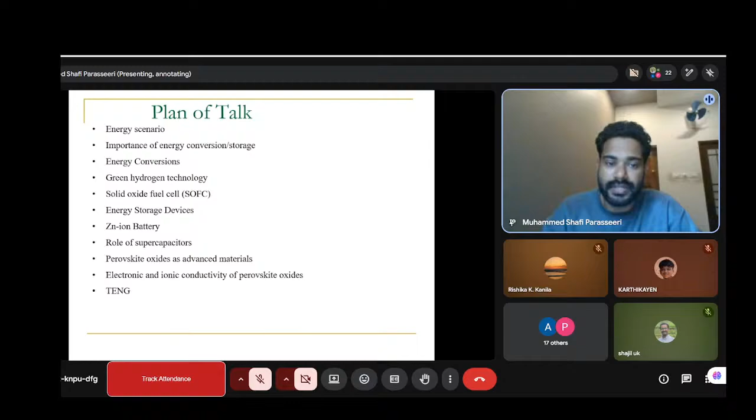I will cover the energy scenario, importance of energy conversion and storage, green hydrogen technology, solid oxide fuel cells, energy storage devices like supercapacitors, batteries, and zinc ion batteries, and triboelectric nanogenerators.

Before going to my topic, I will introduce my career path. I started my schooling from my native place. I belong to Malappuram district, a place called Kisheri, near Kondoti, near the airport.

My UG is from Mambad MES College, affiliated to Calicut University. Then I moved to Aligarh Muslim University for my master's.

Aligarh Muslim University's library is very famous. It is the second largest library in Asia, with many ancient books and a large collection. At a time, 5,000 students can sit and work. There are 7 floors and maybe 7,000 seats. So there is great importance to that library.

Many students join some course in an art subject or something but do not attend the class. Instead, they use the library to prepare for civil service and other competitive examinations, and there are many successful examples.

Then I moved to National Institute of Technology, Tiruchirappalli for my PhD program. NIT Trichy is the number one NIT among all other NITs in India.

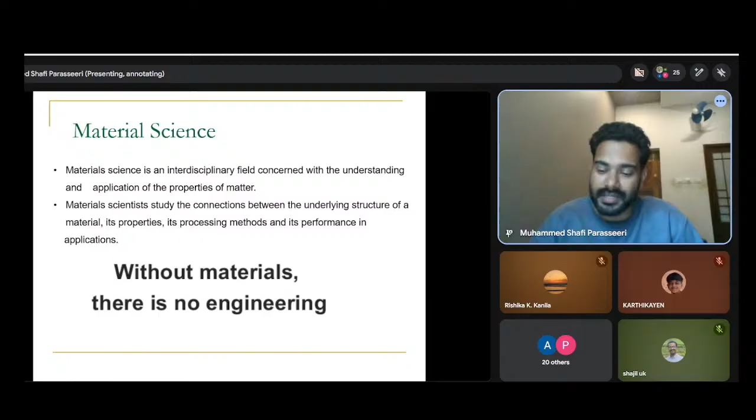This is how, depending upon the property of the materials, we classify the physics, or the material science, into different categories.

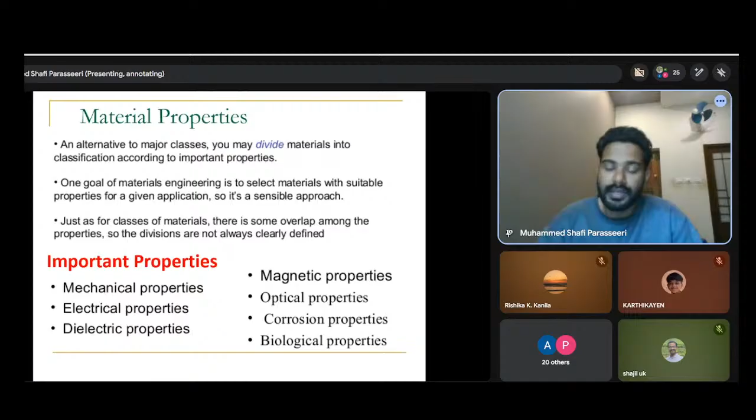So I work on energy material. Why energy? We know that the ultimate factor which controls the world's movement and everything depends on energy. Without energy, we cannot stay, right?

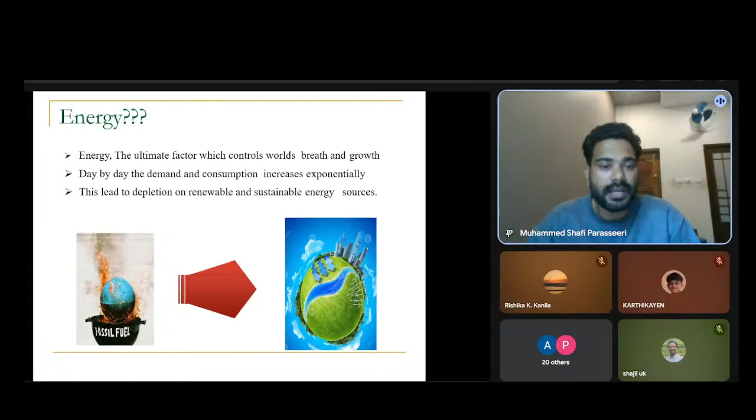Day by day, the consumption and demand is increasing exponentially. And as Shajil sir mentioned in the introduction, because of the war also, now people are facing this issue, we have a shortage of commercial gases, and petroleum product prices are getting high. So this is all because energy is an inevitable component in our life.

And also we know now we are getting the energy from the non-renewable sources, especially from the fossil fuels. So we know the drawbacks of fossil fuels. So the first one is its availability. We have only limited sources. Maybe we can move using the fossil fuels another 80 or maximum 100 years. We do not have much more sources to run our world.

So now people have started thinking about alternate energy. That means what we can do, what alternate source we can find instead of these fossil fuels. And also, other than these limitations and availability, we have some other problems, the environmental issues like global warming and all. Because the fossil fuels, we know, are all non-renewable energy sources. At the same time, they emit gases, pollution.

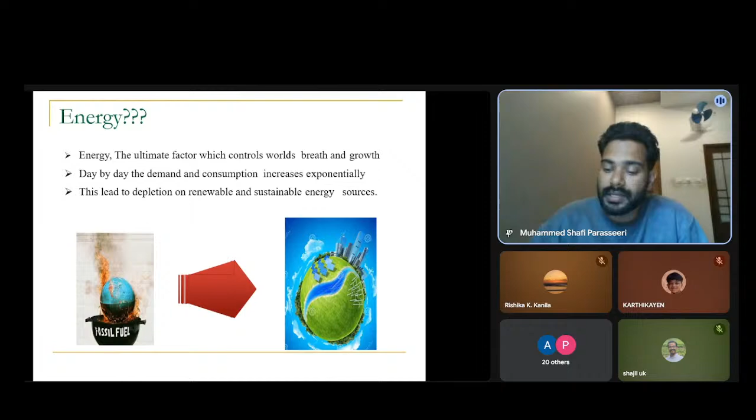They create pollution. The vehicles we are using, the majority of vehicles run on petroleum fuels, right? So we have the emission issue, we have the pollution issue. In the winter season in Delhi, they suffer like anything, right? So we know all these issues. That's why people started thinking about alternative energy and a green environment.

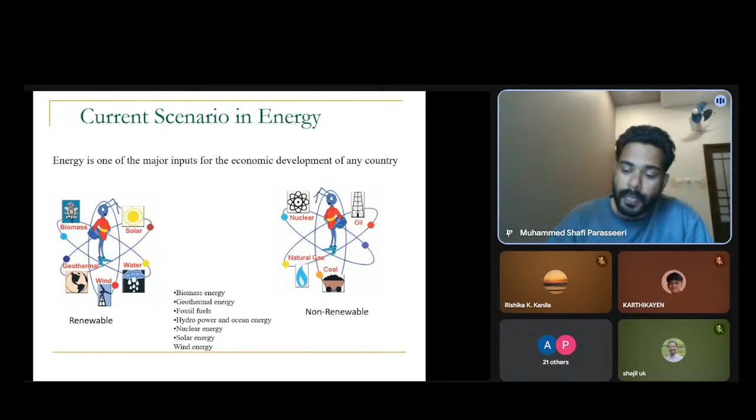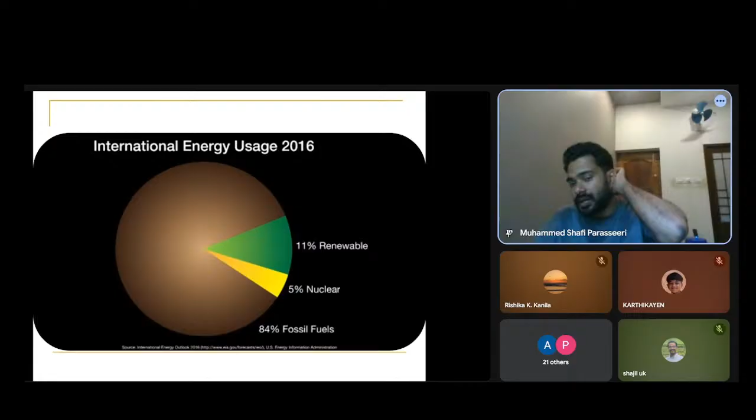So instead of using coal, we have to switch to renewable energy sources. We should move with biomass energy, solar energy, geothermal energy, wind energy and hydropower. Now in 2016, the statistics say that the world depended 84% on non-renewable energy sources, and only 11% came from renewable energy sources. That means the majority, approximately 90%, comes from non-renewable energy sources. So that creates a lot of issues.

So this is the current scenario: the increased demand for energy and shortage of fossil fuels, and at the same time the environmental and pollution issues from using these fossil fuels, global warming, greenhouse effect, all these. According to the World Energy Council in 2017, the growth in energy consumption has been higher than anticipated in the high growth scenario. So to enable the development of a sustainable economy and society, we should move to clean and renewable energy sources that can substitute for fossil fuels. This is the only way we have to overcome these challenges.

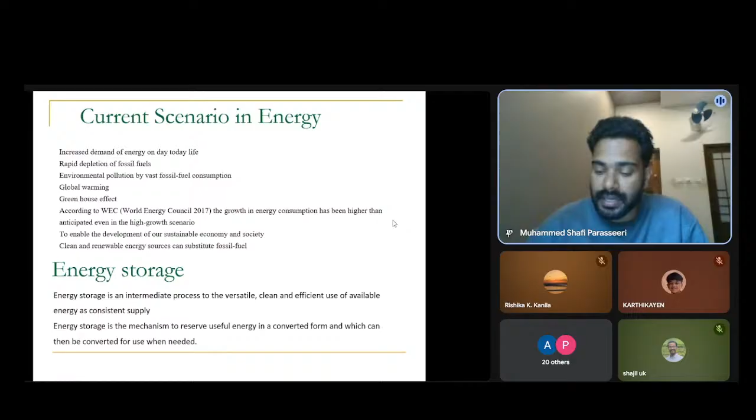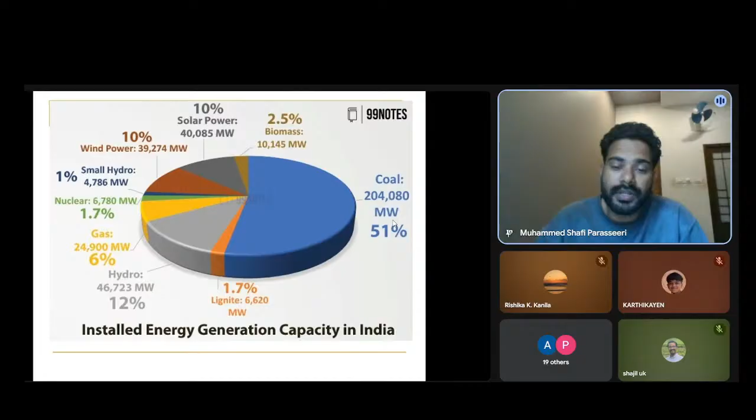India ranked third in renewable energy installation in 2021 as per the Renewables 2022 Global Status Report published by REN21, the Renewable Energy Policy Network for the 21st century. About 42% of India's total installed power capacity comes from renewable energy sources. That doesn't mean we are using 42% renewable energy; it means that of the power plants installed, 42% are renewable. And India ranked fourth in total installed solar power, almost 60 gigawatts for 2021, overtaking Germany.

In December 2022, India had 41.8 gigawatts of wind energy and 61.9 gigawatts of solar energy in place, according to the Ministry of New and Renewable Energy. And projects worth $200 billion are underway in India for the renewable energy sector, as per International Energy Agency reports. That's why people like me are getting funding from the country to develop this kind of technology.

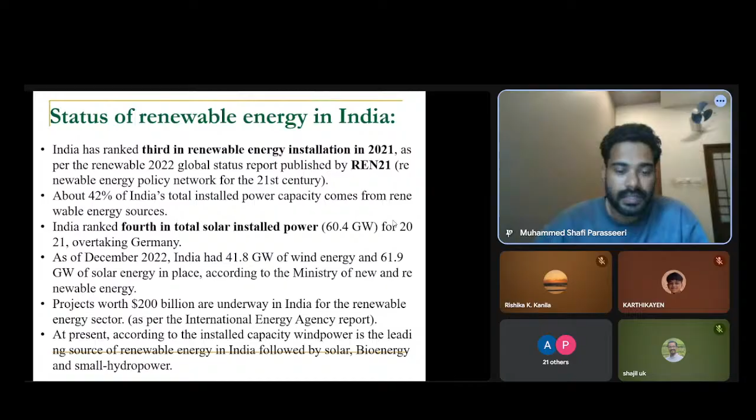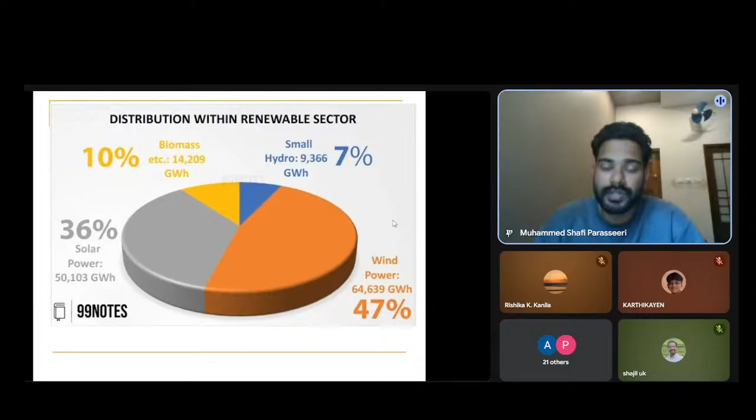So now coming to the distribution of this renewable sector, there are different types of renewable energies in India. This information I also got from 99notes. So you can see 10% comes from biomass, small hydro is 7%, the majority, 47%, is from wind power, and the remaining 36% is from solar power. So this is the statistics of the distribution of the renewable energy sector in India.

Now coming to solar energy, we know there are two types of solar energy. One is using photovoltaics: it can absorb the light energy and convert it to electricity. And another one is the thermal energy from the radiation of the sun that we are using and putting into some channels, and we are using that for electricity generation and other kinds of activities. So these two types are from solar energy.

And coming to the solar energy parks in India, there is Bhadla in Rajasthan, more than 2,000 megawatts, and Rewa, 750 megawatts, and Shakti Sthala around 2,000, and Kurnool, Andhra Pradesh, that is 750 megawatts. So this is the distribution of the solar energy parks in India. And you know the Cochin Airport is completely run by solar power. So you can see there are many large areas of solar plants and solar panels.

Now coming to wind energy, this is just the conversion of wind to mechanical energy and then to electricity, right? So the turbine rotates using this wind, and the issue is we need a lot of investment for that. But it is a long-term investment, so that's why we can get back whatever we invested. But there are many issues for wind generation.

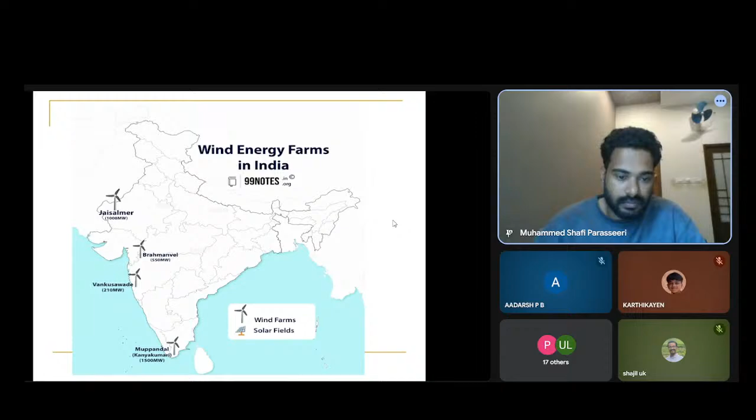Like environmental issues are there: birds, while flying, get killed by the turbine blades. And it is very difficult to put it in a residential area because it makes noise. These issues are there, but still in India we have many wind energy farms. You can see the distributions in the figure, like Jaisalmer and Brahmanvel, and many places are there. You can see here.

And coming to hydrogen, it's another type of energy. It comes from water. So this is a new technology where we are splitting the water, right? We know the constituents of water are 2 hydrogen and 1 oxygen. So if we are able to successfully split this water into hydrogen and oxygen, we can use oxygen for different purposes, like for respiratory issues. The oxygen mask is very important in the hospital, right? So there is nothing to waste. Whatever you get from the water, hydrogen and oxygen, both are important and very useful.

And hydrogen is used as fuel. You can see it in most fuel cells, and nowadays there are hydrogen vehicles also. You know Nitin Gadkari, our transportation minister, has one vehicle that is powered by hydrogen fuel. So what I mean to say is this technology is not far. It is still in a growing stage, but people are using it. This comes from water, which means it's a renewable kind of thing.

So coming to hydrogen, we need 3 steps. The first step is hydrogen generation: we have to generate hydrogen from water, meaning we should successfully split hydrogen and oxygen from water. Another important task is storage. Hydrogen is a light gas, right? So we need a big container, big space to store it, so it is not practical to store it as gas. What we have to do is compress it, or liquefy it by compressing. And hydrogen is very explosive, and it's not feasible to use in normal atmosphere.

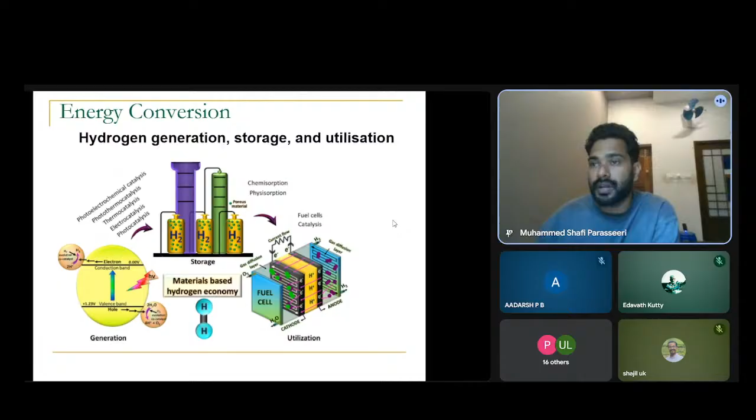Coming to its existence in nature as a gas, we do not have hydrogen. We cannot use natural hydrogen because natural hydrogen is very scarce. It's less than 0.00005%. The majority is nitrogen, then oxygen and argon, these kinds of things, right? So we do not have hydrogen as a free gas in our atmosphere. So what we have to do is get it from water.

That's why catalysis becomes important, because the thermodynamic potential for water splitting is around 1.23 volts. So we have to give this voltage to separate hydrogen and oxygen. That means it is a kind of... instead of making a glass of tea, you are spending a bucket of tea. You are using a lot of fuel and you are getting a small amount. That is the issue with using the conventional method.

That is why people try to reduce this overpotential of 1.23 volts to below 1 volt. Only then is it economic. You have to give a small potential to split the water; only then is it useful. If you are giving a lot of energy to split it, that means it is not convenient, right? So this is why people are working on the catalysis part. Many materials are very good catalysts. They can reduce this potential and enhance the production. So this is for the catalyst.

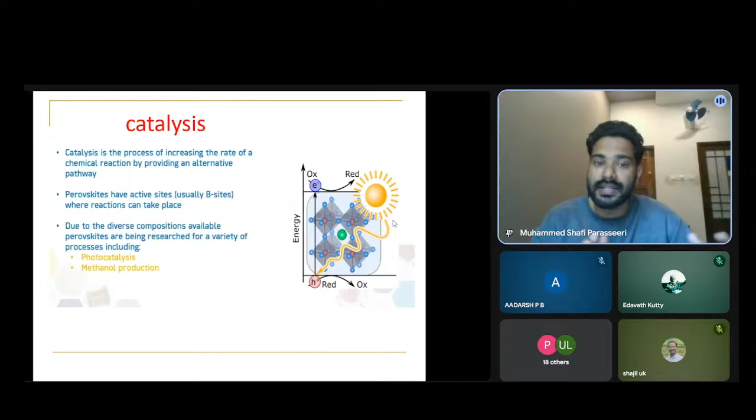Suppose you are using our electricity, whatever we are getting. We already saw some slides showing the majority comes from coal. So that is not good. Using electricity from coal to split water means it's not completely green. So we have to use renewable energy to split the water. Only then can we say the technology is green. Okay. So PEC, the photoelectrochemical cell, is a green hydrogen technology.

Jules Verne, you may know him. Long ago he commented, "I believe that water will one day be used as a fuel." That's what has happened now, because hydrogen is produced from water and we are using it as a fuel. And this is all the energy economy. Maybe I will skip this slide.

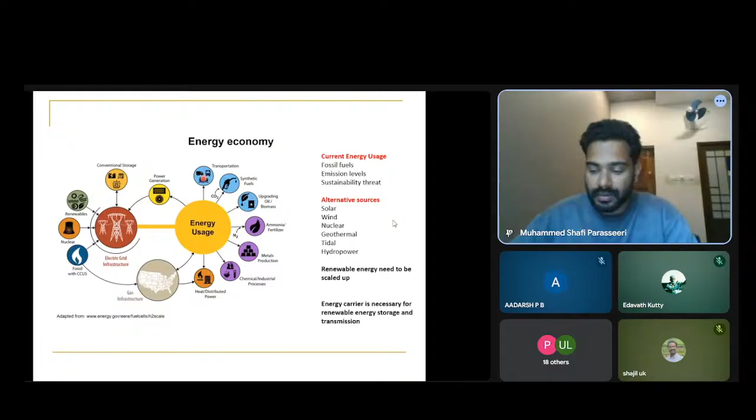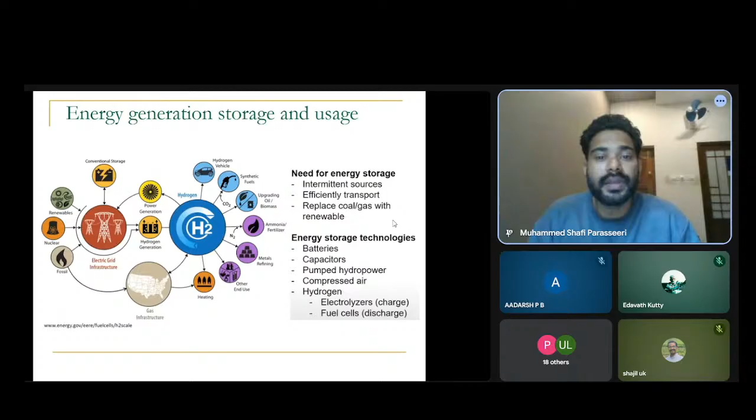And energy generation and storage. Here again, hydrogen. There is a need for energy storage as an intermediate step, between generation and supply. For hydrogen production there are different methods, like green hydrogen production, where we use renewable energy from biomass, wind, or solar. Natural gas is not green, but there are still hydrogen plants that use natural gas and coal, and sometimes nuclear fuels are also used to split water.

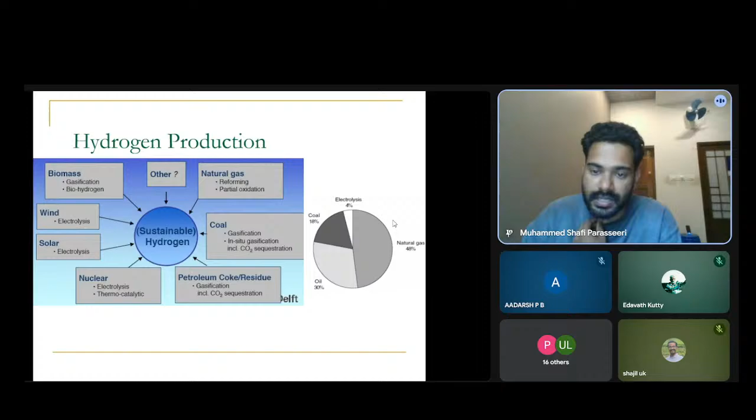Coming to the statistics, 48% of hydrogen production is from natural gas, 4% from electrolysis, coal 18%, oil 30%. For renewable energy conversion, these are the technologies we use: heat as thermolysis, mechanical energy as electricity for electrolysis, biomass to convert water into hydrogen, and there is also photolysis using sunlight.

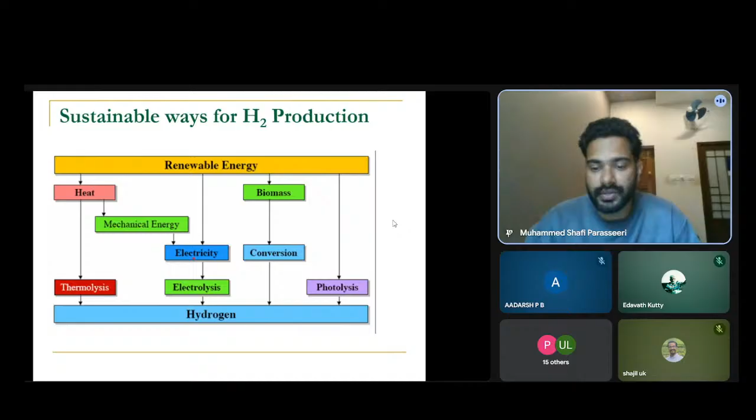But for the oxygen evolution reaction, it is 1.23 volt, the theoretical value. So for total water splitting, it becomes 0 plus 1.23, so it is 1.23 volt. But that is only the theoretical value; usually we need more than 1.5 volt. That's why I already said it is not feasible using 1.23 volt to split the water molecules. So that's why catalysis becomes very important in this sector, in order to reduce this overpotential and to enhance the production.

So the reaction is: at the cathode you will have oxygen plus 2 electrons giving O2-. That means oxygen reduction. Then this oxygen has to conduct through the electrolyte and reach the anode. At the anode, there will be a reaction like H2 plus O2- gives H2O. That means the byproduct is water. So you can see there is no emission of any toxic gases. That is why we call hydrogen a green fuel. If you use hydrogen, the byproduct is water only, so it will not harm the environment. That's why it is green.

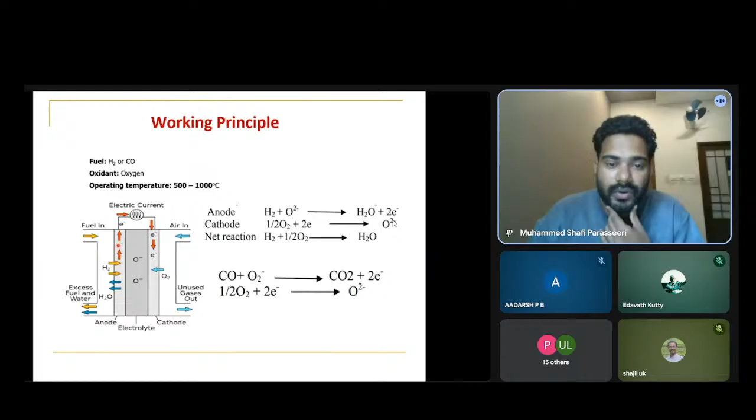Now the working principle, maybe I can skip this; it may be difficult for all to understand. And there are other technologies. Of course, whatever technology I show here is what I am working on in the field; there are many other technologies also. So this TENG is nothing but a triboelectric nanogenerator. You may have heard of piezoelectric, right? The same way, triboelectric uses static energy.

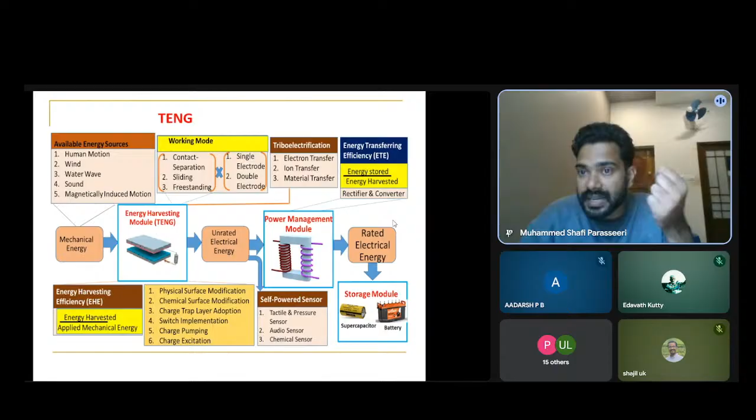We studied in our intermediate that when we use a comb on our hair, we can observe the charging, right? If you keep a piece of paper, it can attract it. That means there is static energy generation. It's the same concept. Triboelectric means it can have different types of operations, and these operations generate static energy, which can be converted into electricity. This is a very, very small scale technology. It uses only the wasted mechanical energy. It's not large scale production; it's very small scale, to power the street light, or maybe sensors. So it is a very small scale industry.

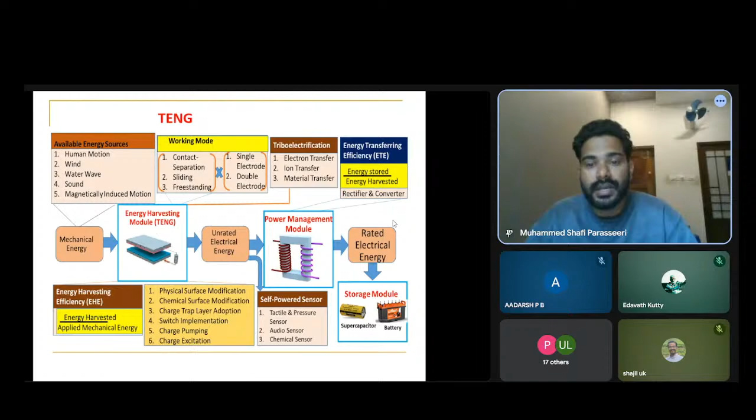So what it does is use available energy, like the wasted mechanical energy. With human motions, we are wasting a lot of energy while we are walking or running, right? And wind energy, water waves, sound, and magnetically induced motions. All these types of mechanical energy we can convert into useful energy using triboelectric nanogenerators. The structure is two layers, one positive layer and one negative layer. Whenever the positive and negative layers come into contact, they generate static charges, positive charges in one electrode and negative charges in the other, while you separate them. Again, if you make contact, it conducts. This is the theory behind it, and we can utilize the wasted mechanical energy using these triboelectric nanogenerators.

This is the working mechanism for triboelectric nanogenerators. You can see here, one is the positive layer and another is the negative layer, so the opposite charges will be stored there. It's similar to a dielectric capacitor. The main drawback is that it is small scale production only. You can get kilovolts, but the current is in milliamps. But still, if you increase the area of this type of material, you can generate good enough voltage, that means energy. There are many indoor stadiums that use this triboelectric generated energy to light their ground, and many kids' parks also. It's already there in Europe.

In Europe, they are leading in this research area, and they have already implemented it in many kids' parks. So whenever there is movement, it can generate triboelectricity, and they store it, and that energy is used for street lights and the lights inside indoor stadiums. You cannot completely run the grid and other industries, but on a small scale you can store and utilize it.

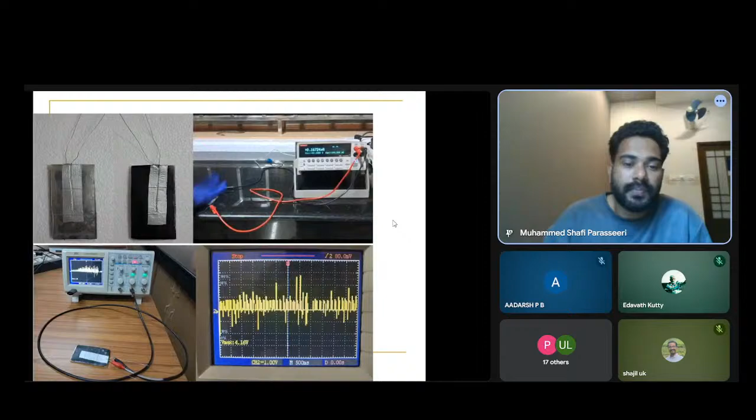So this is what we developed in our lab, 2 layers, and from the research we do we could develop some current and some voltage. So here you can see this. Maybe the value is around 1 volt, and the current we measured, maybe in the coming slide I will show.

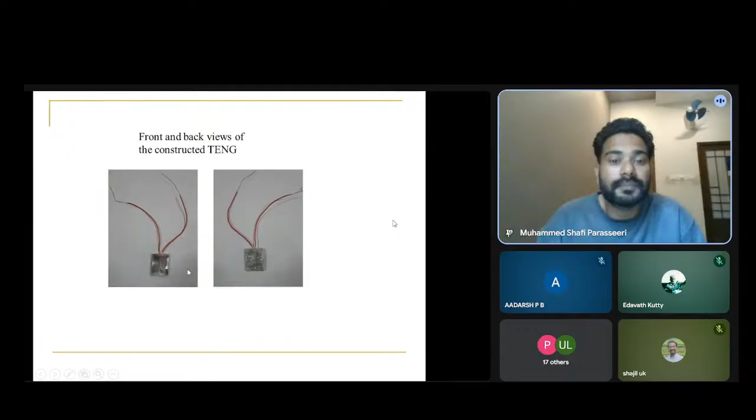Now coming to the storage. The energy storage unit is also very important, right? Why? Because there is a major drawback of renewable energy. We know it is seasonal, right? Suppose hydropower, we can use it only in the rainy season, especially in Kerala. In summer we have a scarcity of water, so we cannot use it.

And coming to solar, only in the daytime we can use it, and that too in the summer, not in the rainy season or in a cloudy atmosphere. Wind also. So all these renewable energy sources are seasonal, so we cannot get a continuous supply from them. This is why the energy storage unit becomes important.

The energy storage unit is an intermediate unit between production and supply. So we have to produce a lot of energy when we have plenty of sources, store it somewhere, and use it whenever the demand comes. That is why energy storage technology is also very important nowadays.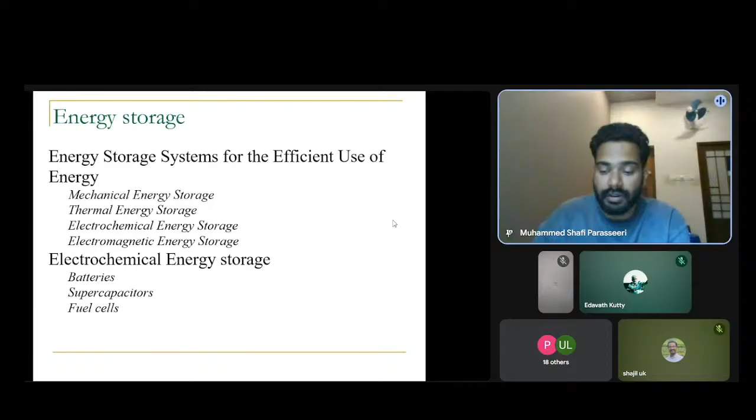Coming to energy storage technologies, we know many sources are there, like mechanical energy, thermal energy, electrochemical energy, and electromagnetic energy. We store in the same way, so there are mechanical, thermal, electrochemical, and electromagnetic energy storage. What I'm focusing on is electrochemical energy storage. We are developing batteries, supercapacitors, and fuel cells. Fuel cells we already discussed.

The simplest way we can understand energy storage is using a Ragone plot. A Ragone plot is the plot between specific energy and specific power. Whenever we go to the market and buy some device like batteries, what we usually ask the shopkeeper is how long I can use it. That means how much energy is stored inside. That may be our first question: what is the durability of this battery?

The second question is, if it is a rechargeable battery, how fast I can recharge it, especially electric vehicles nowadays. The advertisement is like you can charge within 1 hour, 2 hours, and you can use it for maybe 300 or 400 kilometers. So the questions are how long I can use it and how fast I can charge it. These are the two questions we ask whenever we buy products related to energy.

So this is how we can compare different energy storage devices, like ordinary dielectric capacitors, supercapacitors, batteries, and fuel cells. All these four you can compare using a Ragone plot. How fast is a dynamic process, a rate, so it is power, specific power, on the y-axis. And how long depends upon how much energy you have, so that is energy.

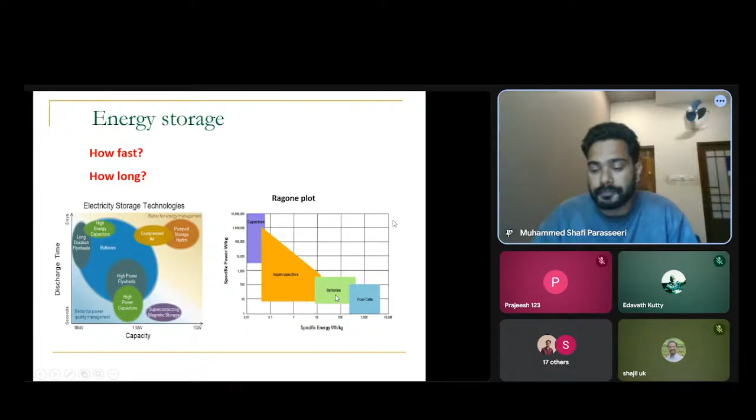In a more simple way you can understand this - a battery is like a marathon, that means you need constant energy for a long duration. And a capacitor, a dielectric capacitor, is like a high jump - you do not have the energy for a long duration, but the moment the demand comes, you have to give the entire energy within a moment of time. It's like a high jump, right? When you jump, you have to put in all your energy, right?

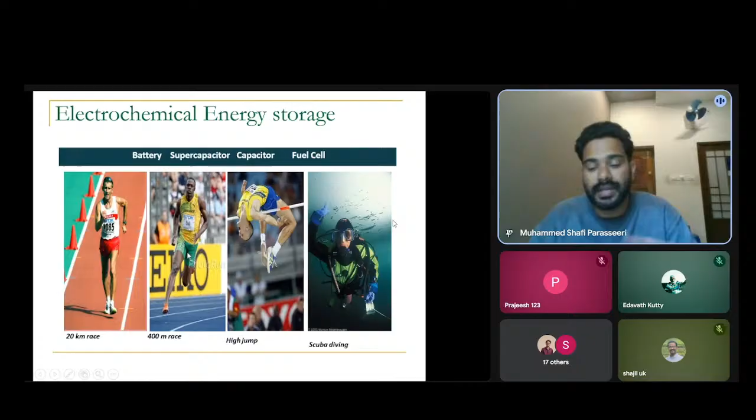And fuel cells are like scuba diving - however much oxygen you have in your tank, you can stay underwater that long, right? But a supercapacitor is like a 400-meter race - that means you have to finish the 400 meters, and also you have to be the first, that means you have to run fast. So you have to complete it, and you also have to run fast. So a supercapacitor is more or less similar to a 400-meter race.

Capacitor - you may already know, a dielectric capacitor is nothing but a parallel plate capacitor. For simple understanding, we can take the example of a parallel plate capacitor. There are two metal plates, right? And in between, there will be a dielectric medium. So when you apply some potential across these two plates, the dielectric medium will polarize - the positive charges and negative charges will be stored in opposite polarity. So this is what happens in a dielectric capacitor.

And we know that the capacitance equation for a dielectric capacitor is epsilon into A by D, right? Epsilon is the dielectric constant, A is the area of any conducting plate, and D is the space or distance between these two plates, right?

Now coming to the word supercapacitor - something super, we call it, when we call super, we know the superconductor. We call it superconductor because conductivity is very high compared to what we get in ordinary metals, right? So this is why we call it superconductor. Same way, supercapacitor also - the capacitance is very high compared to the ordinary capacitor.

So how can we get that capacitance? The only way is - you cannot increase this value, because epsilon is constant for any material, right? You can only do it in two ways: one is you can increase the area, and another one is you can decrease the distance between the plates.

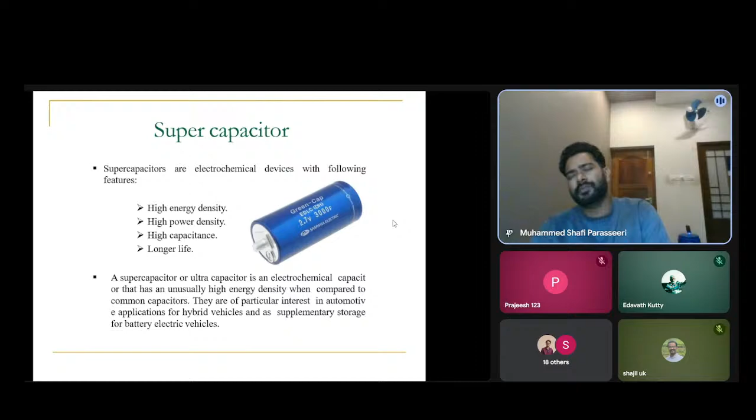So now the supercapacitor is, what they did is they just replaced the dielectric medium with an electrolyte, and instead of metal plates, they used porous materials, say porous carbon. We know that porous carbon has very high surface area, around 2,500 meters square per gram. And if you use electrolyte instead of the dielectric medium, you can store these electrolyte ions in the pores of these electrodes.

Also, whenever you have this electrolyte interaction with the porous electrodes, and if you apply the potential, you can have storage of static charges or electrolyte ions inside these pores, and there will be layers. Like the first layer, maybe if your electrode is negatively charged, then there will be positively charged ions adsorbed on the surface, and again after that there will be a negatively charged layer. So similar kind of many layers will be there. And the size of these layers, maybe it's like ions, right?

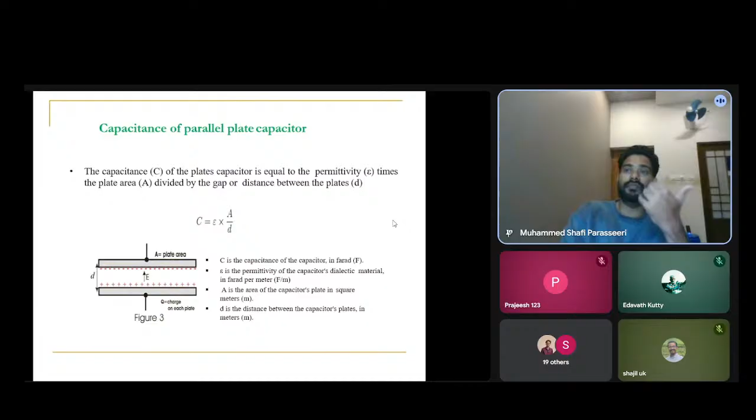So the size of ions is in Angstroms. That is why the d-spacing can be reduced down to the Angstrom unit. And the surface area, since it's porous carbon, you're getting around thousands of square meters per gram. So this is how a supercapacitor achieves very high capacity. Hope you understood that one. And those are the principles.

Now coming to the supercapacitor, there are many different types of supercapacitors, depending upon the materials used. The most common one is the double layer capacitor, EDLC, electric double layer capacitor. EDLC is made up of carbonaceous material, that means you cannot have any redox reactions like batteries.

But pseudo capacitor means it's more similar to electric double layer, but there will be surface redox reactions. It's not like batteries, but compared to EDLC, it has small redox reactions also, so it's a combination of both. And hybrid capacitor means you can have one electrode with EDLC behavior and another with pseudo capacitor behavior. So if you use a combination of these two, then you get a hybrid capacitor.

So what are the peculiarities or specialities of these three classes? We can understand this mostly in this slide. If you are having EDLC, electric double layer capacitor, that means it is more or less similar to our dielectric capacitor. It's just polarization and adsorption of ions on the surface. It does not have any bulk property.

But pseudo means it has some bulk property. It can penetrate into the electrode materials, and you can have redox reactions like batteries. And hybrid means you will have a combination of both this EDLC mechanism and pseudo mechanism. That means it is in between batteries and capacitors, right?

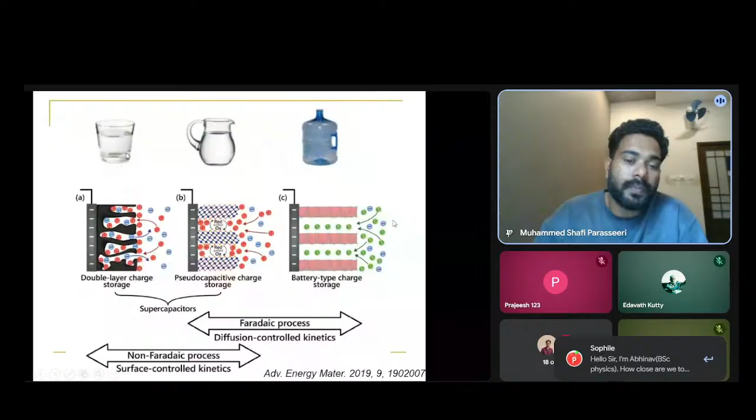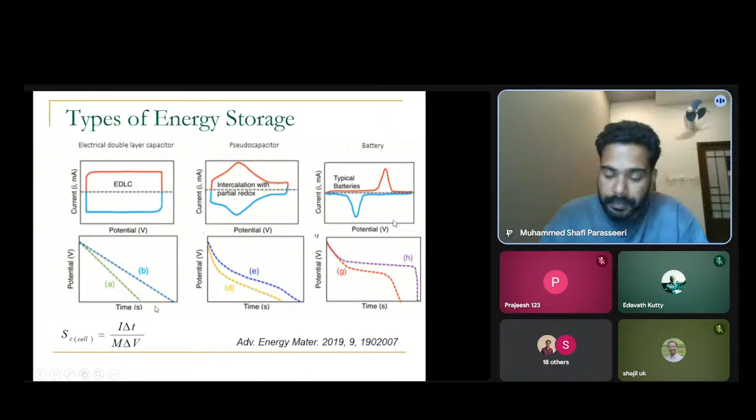So these are all the characterizations, maybe not familiar to you. This is what we call a cyclic voltammogram, and this is the charge-discharge cycle, that means potential versus time. And these are the factors we use to validate the performance of a supercapacitor: we calculate energy, power, capacitance, and specific capacity.

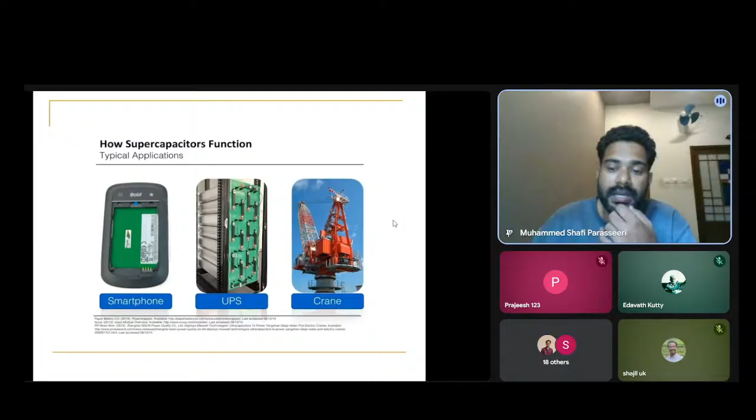Applications: we know smartphones, it is not implemented still, but there are applications in UPS, cranes, emergency windows and all, supercapacitors are used. And you know there are electric buses and trains, they use supercapacitors.

So the limitation of a supercapacitor compared to a battery is that we cannot store much energy, because only the surface is used. But we can charge fast, fast charging is possible with a supercapacitor. So what they do is, at every stop the bus or train has to charge, and the charge will last only up to the next stop. It cannot run the whole route. But the time for passengers getting down and getting on is enough, 1 minute or 2 minutes is enough to charge the supercapacitor. That's why it is possible.

Now the electrode materials, I will skip this part. These are the materials used.

Coming to the energy grid applications, we know supercapacitors cannot replace batteries, or we cannot use them in grid applications because for energy grid we need bulk storage, we need to store a lot of energy. That's why we are not using this for energy grid application, but for electric vehicles or portable electronics, it may be used. And it is used, not maybe, it is used.

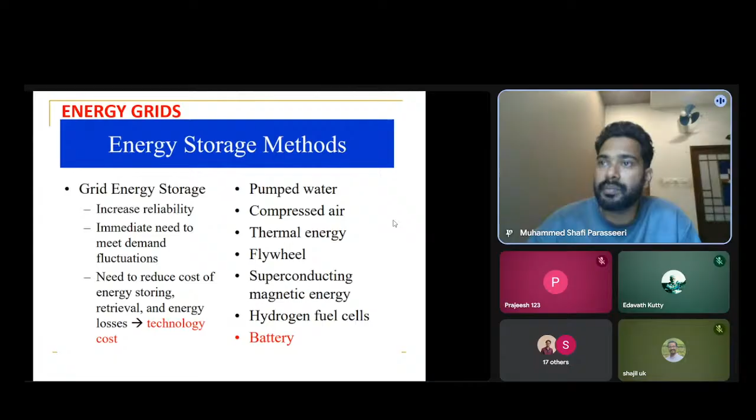Now coming to the grid applications, then we have to move to the batteries, right? Batteries having bulk energy storage property.

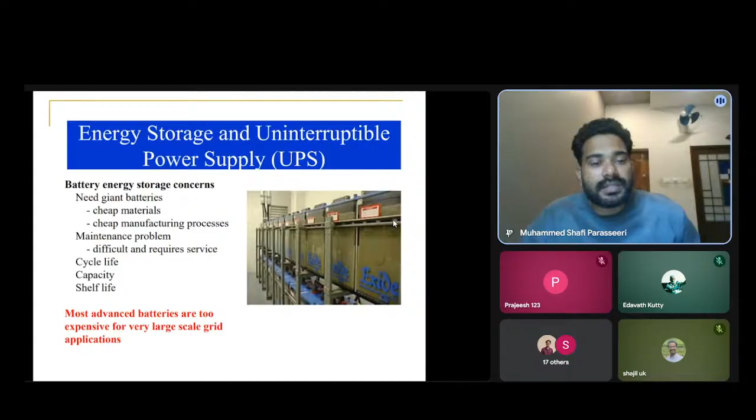Now coming to the battery, we know the master of battery is lithium-ion battery. Everywhere you see, your mobile phone, your laptop, your electric vehicles, everywhere you can see lithium-ion battery, right? But the problem with lithium-ion battery, we know the positive things too: it is very light, that's why it is very popular. It's lightweight, lithium is after hydrogen, the lightest element in the periodic table, and it is very easy to charge and discharge. The battery chemistry is very... but the problem is...

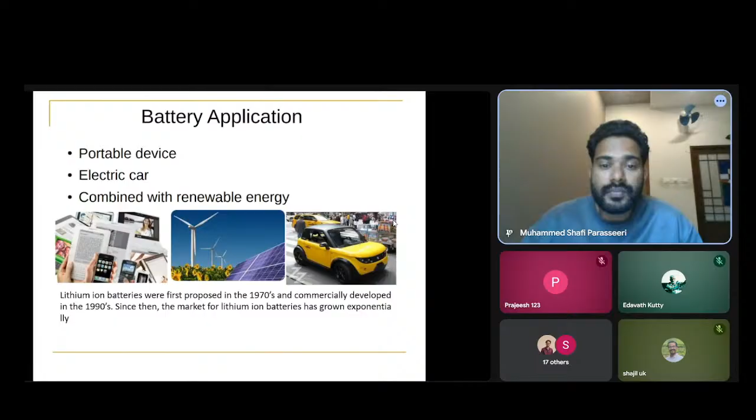There are many issues using the lithium-ion battery. You may see in the newspaper many electric vehicles catch fire, right? And there are issues, like 2 years back in South Korea one battery factory got fire and around 20 engineers were killed, right? So this kind of issues are there. It's like a nuclear reaction.

If battery means it's a combination of cells, right? There are many cells connected in parallel and series. So if one cell catches fire, it spreads to the next one, again it spreads to the next one. So it's like a chain reaction. And because the lithium battery is highly flammable due to the organic electrolyte used inside, short circuit happens in the lithium battery, so these issues are there.

Another issue is lithium is very expensive. It is not distributed uniformly in the globe, so it's not plenty, it's not abundant in nature, so it is very expensive. So these two are the major drawbacks of lithium battery.

That's why people are thinking of alternative sources or alternative materials for batteries. Coming back to the lithium battery, it's not only lithium that decides the property, there are many other things like what the electrode material is made up of.

There are many classes of lithium batteries, especially used in electric vehicles. LFP means lithium iron phosphate. There is NMC, that is nickel, manganese, cobalt. And there is NCA, nickel, cobalt, aluminum, and lithium titanate, LTO. And there are solid state batteries, this is the future technology.

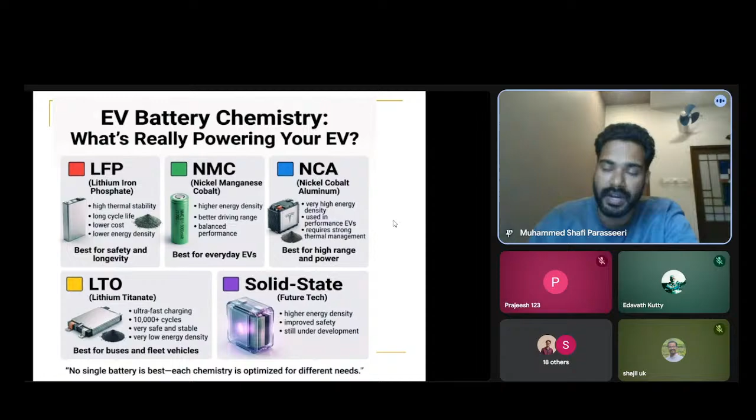But there are many ionic conductors in solid form. So people are doing research in this area, and hopefully within a few years, we will get solid state batteries everywhere. Okay. Now coming to another technology, that is zinc ion battery. So we are working on zinc ion battery in our lab.

So Shajil sir, how much time left for me? Hello? Hello, am I audible? Yes, sir. Yes, you are. Okay, so can I take 5 minutes more? It's almost 1 hour. Oh, sure. As long as you need to finish the talk. Okay, thank you.

Yeah. So because of this issue we face in lithium ion batteries, there are other batteries: sodium ion batteries, zinc ion batteries, aluminum batteries. Why it is important: the first thing is the availability of lithium. Lithium is not distributed uniformly and it's very expensive. And the second problem is the explosion, the catching fire issues.

So to overcome the first issue, availability, we can use naturally abundant materials like zinc and sodium. These are all more than 10 times as abundant compared to lithium. And aluminum also. But still, if you use the organic electrolyte, we have issues of catching fire. So we have to replace this organic electrolyte with non-flammable electrolytes. So we are focusing on aqueous zinc ion batteries, where the electrolyte is an aqueous solution.

But yes, it appeared once and disappeared again. Again. Yes, sir, it's visible. Oh, again gone? Yeah, I think when I maximize it in presentation mode, it is happening. Maybe I will share the entire screen. Now it's fine, right? It's fine. Now it's good.

Okay, thank you. So that is the reason we use the aqueous zinc ion battery, and you can see the gravimetric energy and gravimetric power in the Ragone plot. Its position is good compared to other energy storage devices. We have high power and high energy here compared to all these, right? So this is the leading one. Of course, sodium ion is also there. It also has potential applications, but there are some dissolution issues.

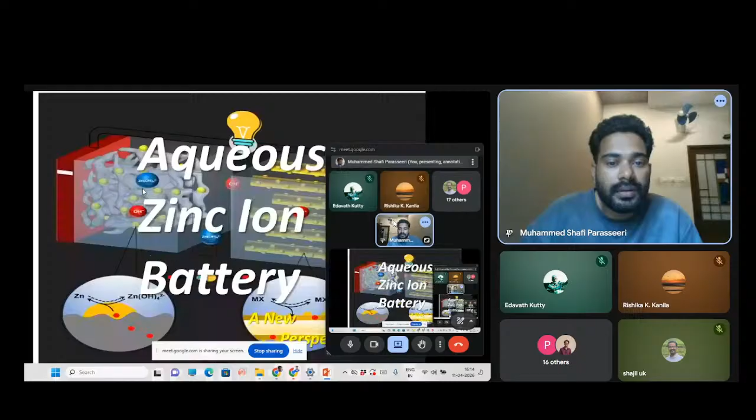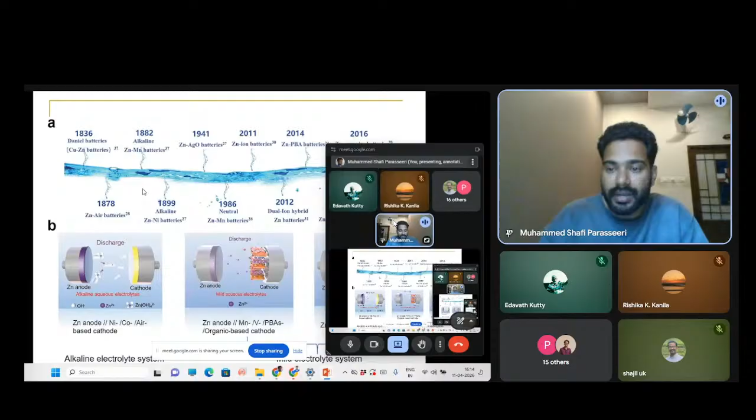But we know that zinc ion battery is not new. It started long back, but research on the rechargeable zinc ion battery has been going on in recent years. You know the histories and all, okay. So the main advantage is the multi-electron transfer, as it is Zn2+.

Yes. But still there are problems we are facing: the dissolution, sluggish diffusion and dendrite issues. And also what we are doing is we are working on electrode materials, and we are trying to suppress the dendrite issues and other drawbacks, low ionic conductivity and all.

For low ionic conductivity, we are using materials like perovskite oxide materials. Perovskite oxide materials have the inherent property that they can have both ionic and electronic conductivity. There are multiple cationic sites, and oxygen vacancies are also used for this ionic conductivity. These are some examples we did in our lab, zinc-ion battery studies. So perovskite oxide materials we usually use for these applications.

Perovskite oxide is nothing but the ABO3 structure. There will be an A cation, a B cation, and 3 oxygens, ABO3. So in order to get electrical conductivity, you can substitute this material with a lower valency. Suppose it is A3+, B3+, and O3 6-. If instead of A3+ I use a 2+ cation, then there will be a charge imbalance. That means you can have hole conduction or electron conduction.

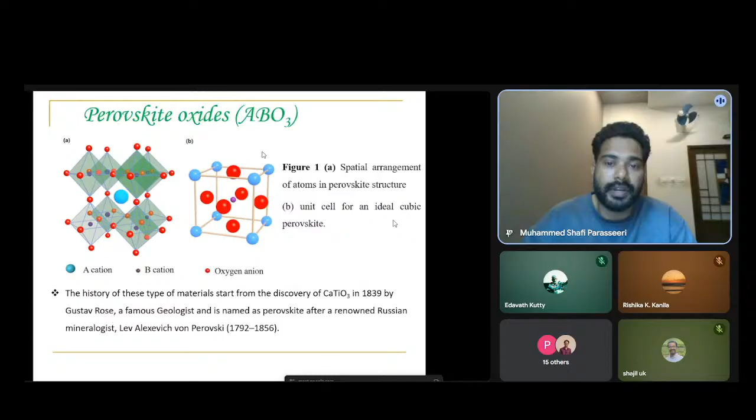Same way, if you create an oxygen vacancy here, you can have ionic conductivity, that means oxygen ion movement. So this is how we are improving our ionic conductivity and the performance of the lithium-ion battery. So we'll not discuss all these things.

So applications: the zinc-ion battery is mostly used in grid applications because it is heavy compared to the lithium-ion battery, but still the energy density is very high. For a static energy storage device, we are not concerned about the weight. That is why we can use this for static applications, like energy grid and power grid applications. Now these are all the works we did.